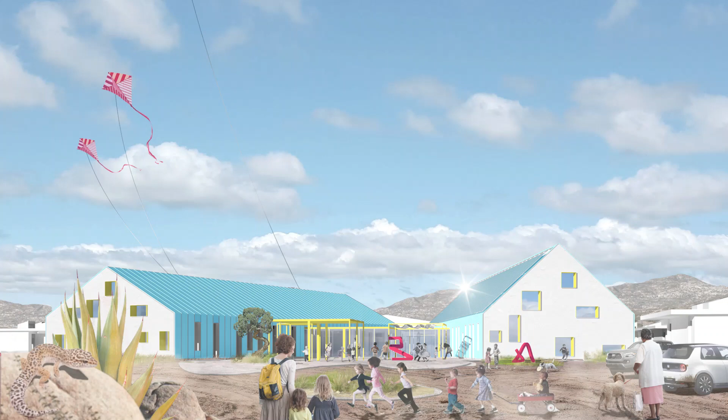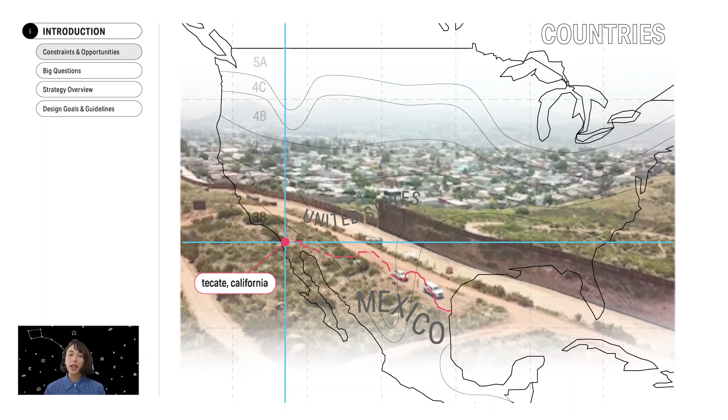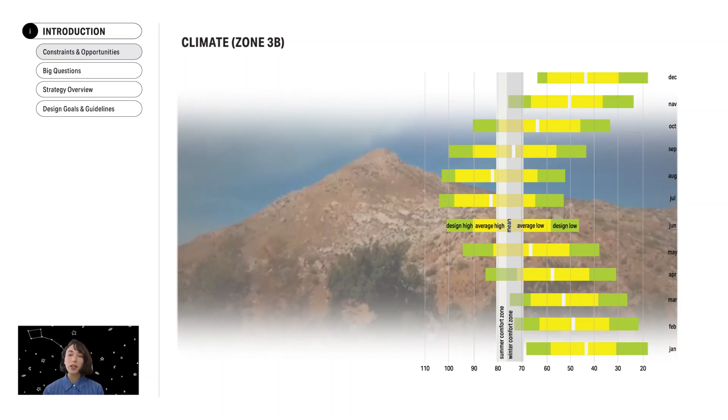Constraints and opportunities. Between Mexico and the United States, a hard line stretches over 1,900 miles, dividing countries, cities, ecologies, and even families. Our site is located in Tecate, California, 1,500 feet from this border. Sheltered by mountains at 1,700 feet elevation, Tecate experiences a climate close to that of San Diego, California, with much of the year being within the comfort zone.

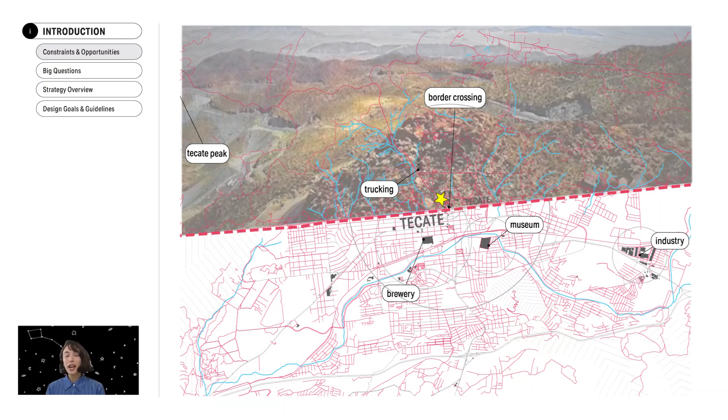Two incredibly different demographic and spatial environments exist, separated by a thin border. Tecate, Mexico is a dense suburban city and a destination for tourists. Tecate, California is an international trade community and gateway between the two countries. While there exists a physical wall between the two cities, they are far from independent of each other.

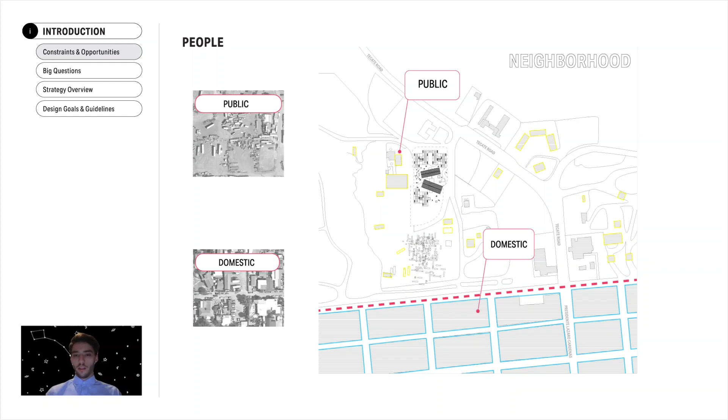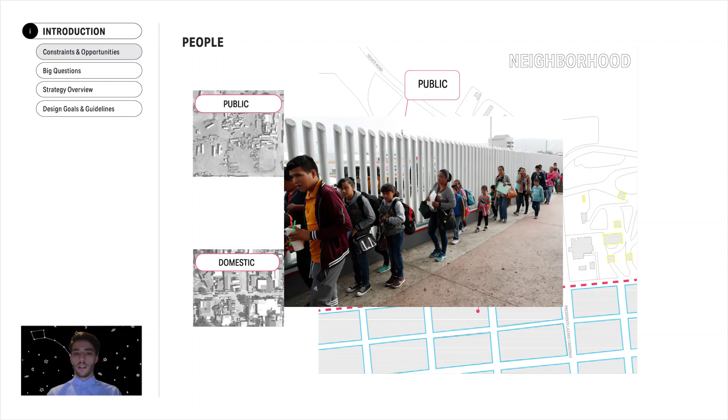With a population of 73,000, the density of Tecate, Mexico in relation to the 650 people of Tecate, California leads to a flux of diverse interaction across the border. Tecate, Mexico is demographically diverse and culturally rich, while scattered residents, government staff, and industrial workers reside in Tecate, California. Due to this imbalance, the school has potential to bring the two communities together, as a majority of students come daily over the borders from Mexico.

Climate change, border injustice, overconsumption. We asked ourselves, how can we teach children about these global challenges? And how can design teach children about these global challenges? In order to explore these questions, we look to how scientists and researchers study problems. A common tool for them is the neutral field, such as a petri dish, a glass slide, a vacuum. They allow phenomena to be isolated and studied individually.

This led us to ask the question, what if we break down global challenges into kid-sized learning moments that could be highlighted against a neutral field? The seemingly incomprehensible issues humanity faces, such as climate change, must be taught to children as they become the next stewards of the environment. These complex challenges are symbolized and broken down into kid-sized, interactive exercises through the school's design.

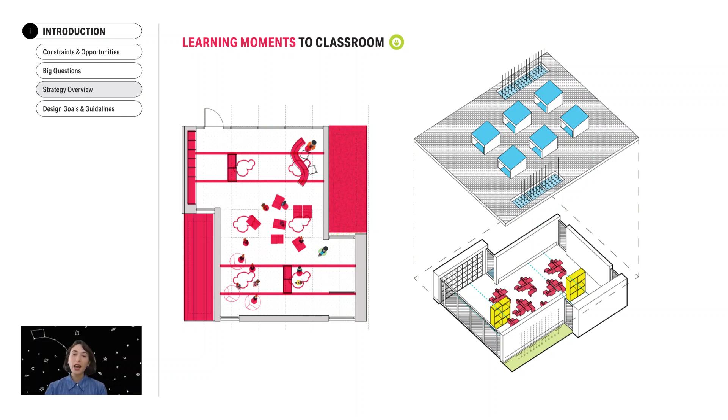As architecture and form take a back seat, climate systems and interactive objects become drivers of the student's education at all scales. Students are given responsibility over their classroom. Under the teacher's guidance, students operate active and passive climate systems, rearrange the spatial organization, and learn how to be responsible stewards of their environment.

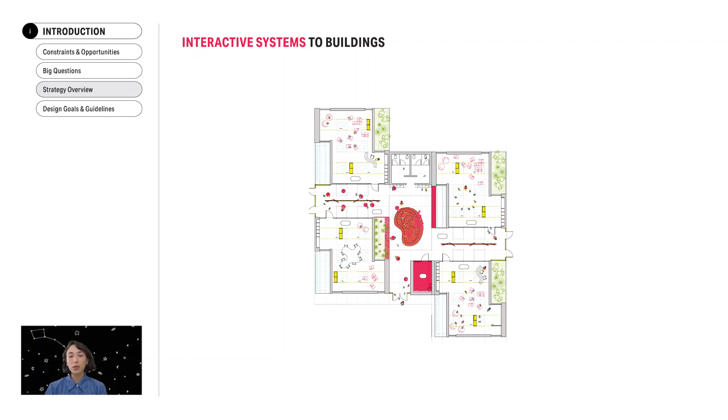The classroom cluster is a hub for students and teachers. It acts as a safe place for fostering relationships, learning, and exchanging cultural values. The site is organized on a 5-foot grid that represents the neutral field. The classrooms and pavilion structures are aligned to this grid and become parts of the neutral field.

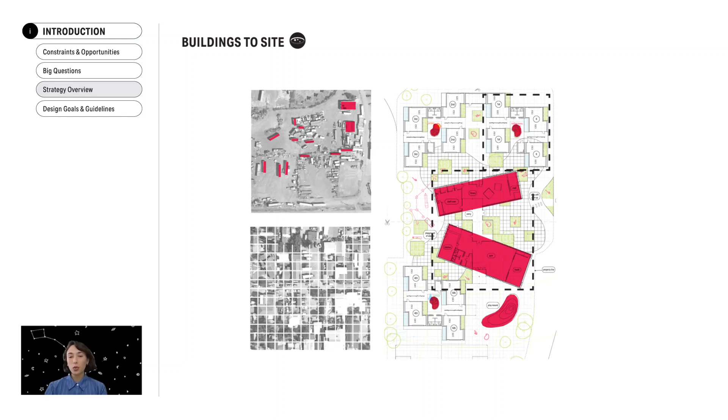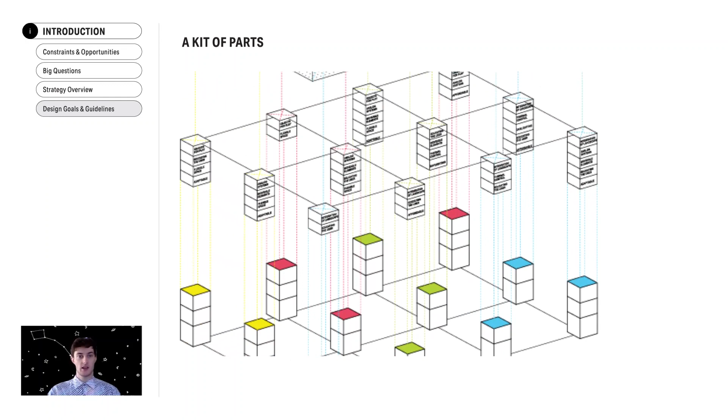The two community buildings break the grid and stand out on the field as specimens. This relationship of specimen to field, community to school, fosters student connection to each other, staff, and the local community. Throughout this project, a conceptual kit of parts organizes the presentation and explains our design thinking. This kit of parts consists of two critical concepts: specimens on a field and interactive relationships.

Different objects and systems correspond to specific learning guidelines: reciprocal energy, kids as stewards, inhabitable threshold, emergent play, and beauty is for everyone. Throughout the presentation and in the architecture itself, these guidelines are indicated with their corresponding color, visually telling the story of interactive learning moments and energy strategies.

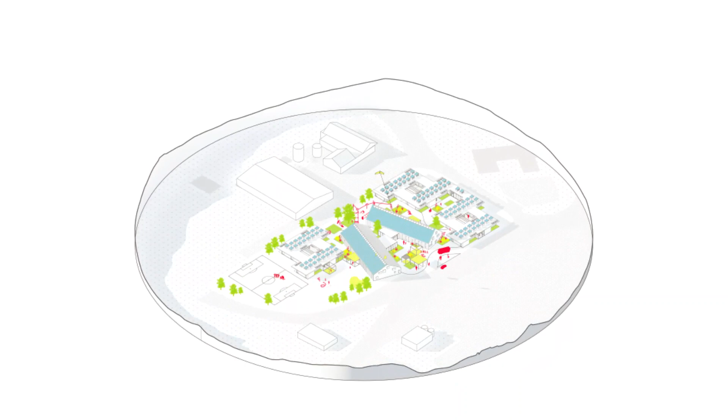Next, we will dive into our response to the decathlon competitions. As Newton's third law states, for every action there is an equal and opposite reaction. This energy balance is physically represented throughout the project in the objects, systems, and architecture. Little Dipper Elementary is a net positive school. We use 3 main strategies to achieve this and reduce energy use.

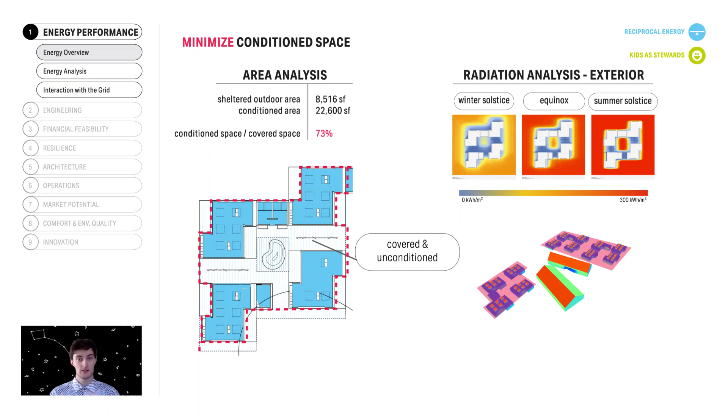First, minimize conditioned space. By providing covered outdoor circulation and gathering spaces, we reduce conditioned volume. Outdoor circulation is common for schools in this climate, minimizing demand for mechanical systems. Second, utilize passive climate systems. Solar chimneys, low windward vents, and cooling ponds allow for natural ventilation and evaporative cooling, while thick walls on the east and west reduce heat gain and increase thermal lag. And optimal use of daylighting reduces the need for electrical lighting.

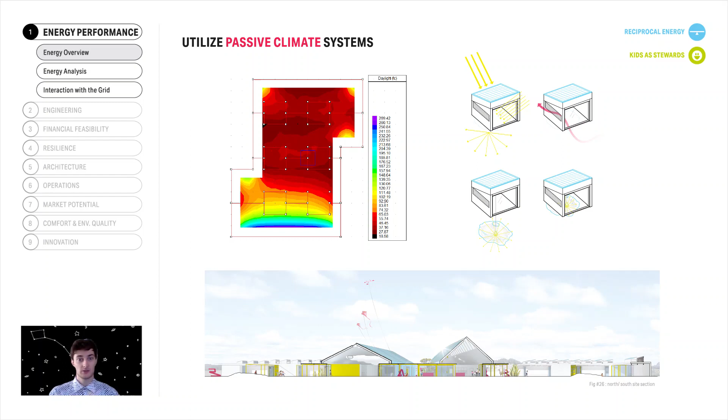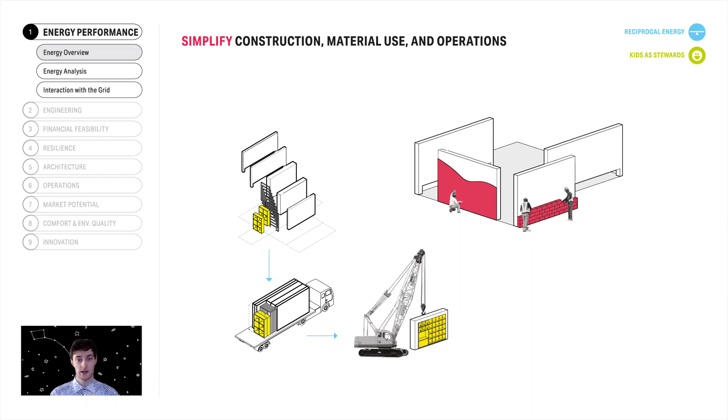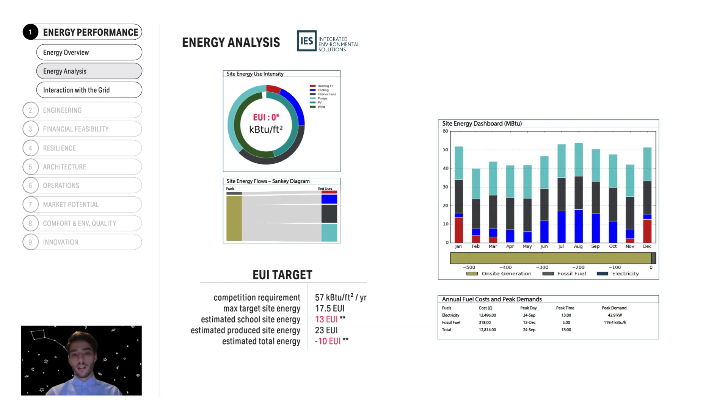Lastly, simplify construction, material use, and operations. Tied to our marketability strategies, we designed with accessible, understandable, and affordable systems in mind. We ran analyses in Integrated Environmental Solutions Virtual Environment, or IESVE. Using baseline climate systems, our model resulted in net zero energy use intensity, or EUI. With our proposed passive climate systems, we exceed the target site EUI of 17.5 with the projected site EUI of 13. With on-site generation, the school achieves a net EUI of -10.

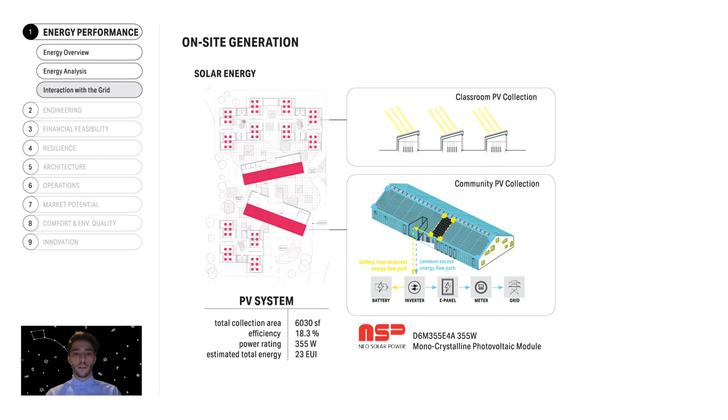Little Dipper Elementary produces more electricity than it uses with a standard monocrystalline photovoltaic array. While most energy is used on-site, leftover energy can be supplied to the local power grid. Energy systems are not only typical, but novel as well. Still under development, high-altitude autonomous kites can be tethered to generators on rooftops to produce energy. The prominent visibility of the kite also acts as a beacon that can be seen across the border, reassuring families through a visual connection to their children. Engineered systems on display show students the reality of how buildings provide shelter.

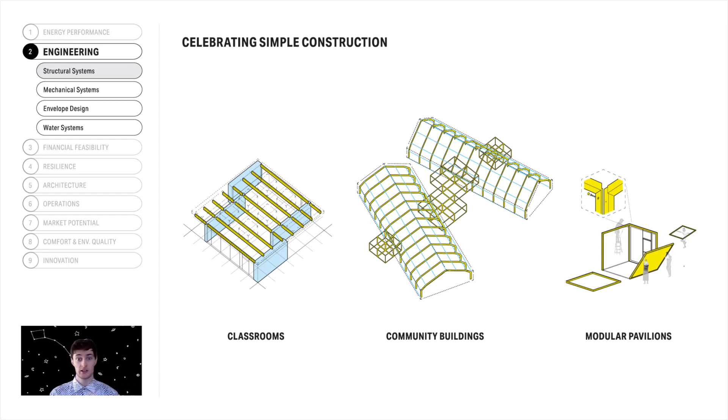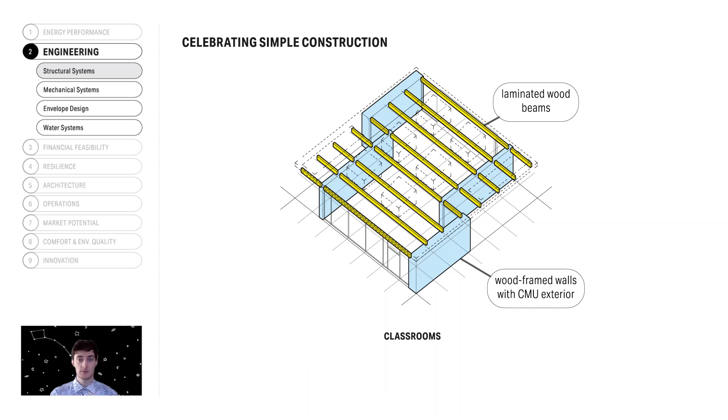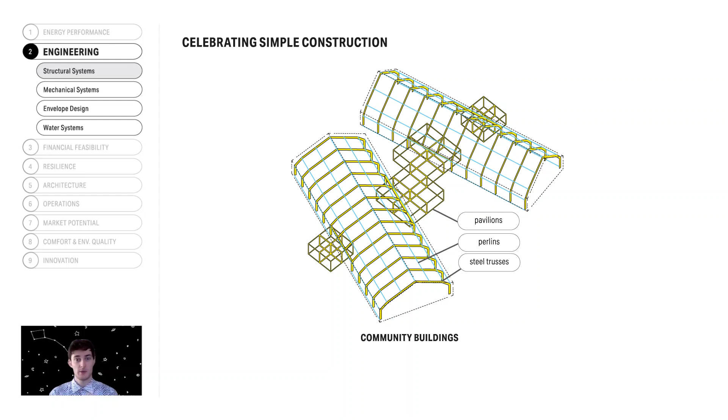Accessibility and simplicity drive the design of the structural systems, allowing the school to put more money into vibrant learning experiences. The classroom consists of prefabricated wood-framed wall panels with an exterior CMU layer. Laminated wood beams span the distance between the walls and support the flat roof. Continuing the tradition of industrial construction in the area, the community buildings are made of widely available prefab steel trusses, with knowledgeable builders and materials close by. Prefabricated modular pavilions are assembled on-site with standardized structural square frames that can be fitted with a variety of infill panels.

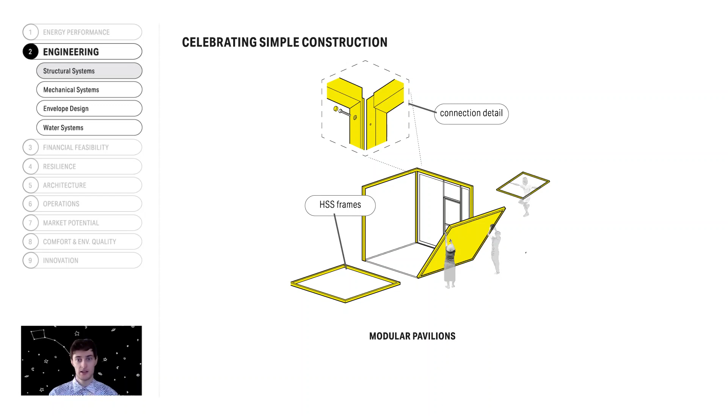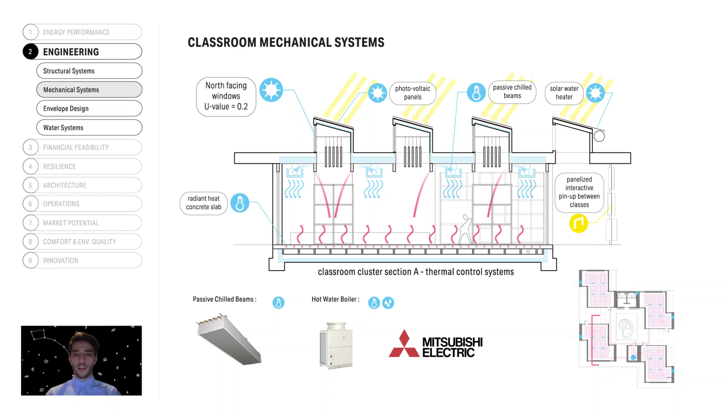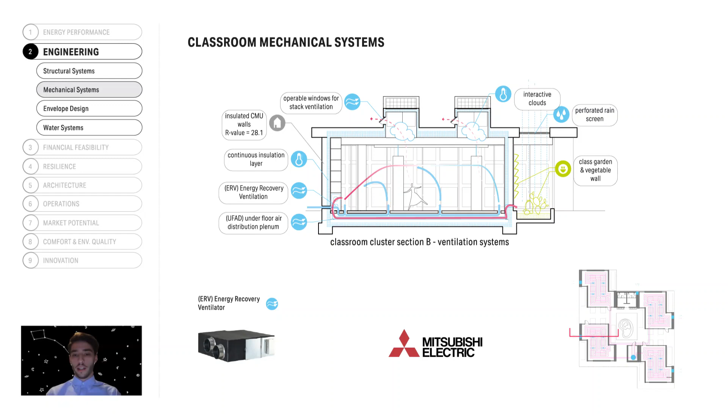Radiant floor slabs make the classroom cozy by the time students arrive. In cooling mode, passive chilled beams cool rising hot air. Low windward intake vents sit above an evaporative cooling pond, cooling supply air. Roof monitors provide evenly distributed and adjustable daylight for classroom activities. Classroom air is kept fresh via an energy recovery ventilator. Operable roof monitor windows work in tandem with low windward facing vents.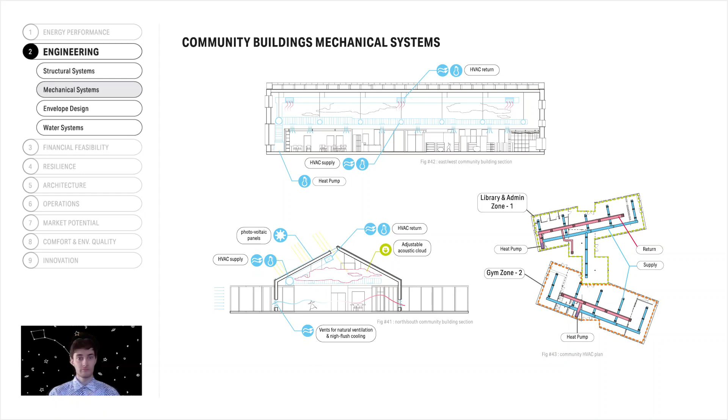In the community buildings, we wanted to reflect the industrial vernacular and utilize a standard high-efficiency HVAC system. The community building's wall assembly, which wraps the roof, can be summarized as a highly insulated industrial warehouse. Following passive house principles combined with prefab wall assemblies, the classroom wall is designed to maximize thermal insulation and affordability. Little Dipper Elementary reduces its water use by implementing a cradle-to-cradle approach to waste. Composting toilets and compost gardens teach students about taking responsibility for their own waste, and rainwater collection reduces dependence on city water.

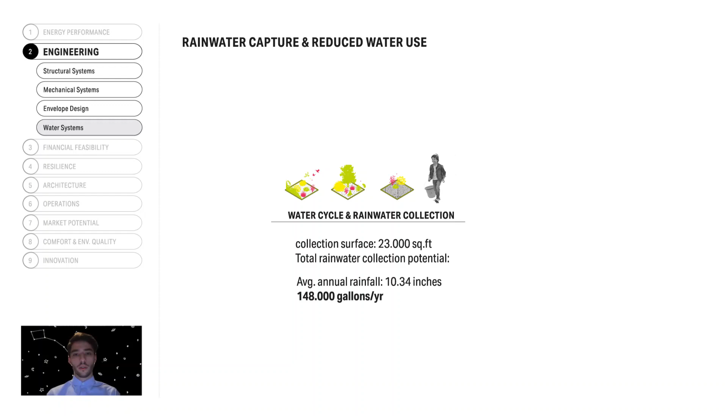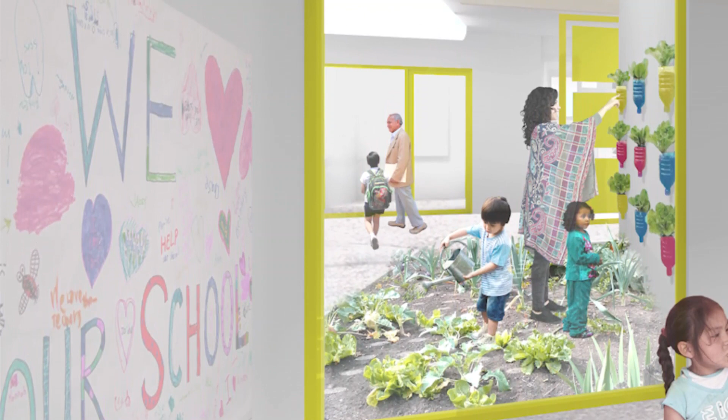We believe that beauty is for everyone. This value is carried throughout the project to create equitable access to beautiful spaces by reducing maintenance, operations, and construction costs at every scale. We designed buildings that were inspired by the local vernacular. This means that maintenance and repairs can be contracted locally, and the low-cost, durable industrial materials can be sourced locally as well. A variety of factors reduce maintenance needs, reduce energy consumption, and reduce operations costs.

Passive, along with low-tech systems, means fewer moving parts likely to break. The exclusive use of native vegetation fits seamlessly into the site's ecology, requiring less human intervention. And most importantly, student participation in daily maintenance and operations is integrated into the curriculum, inspiring students to become responsible stewards of their environment.

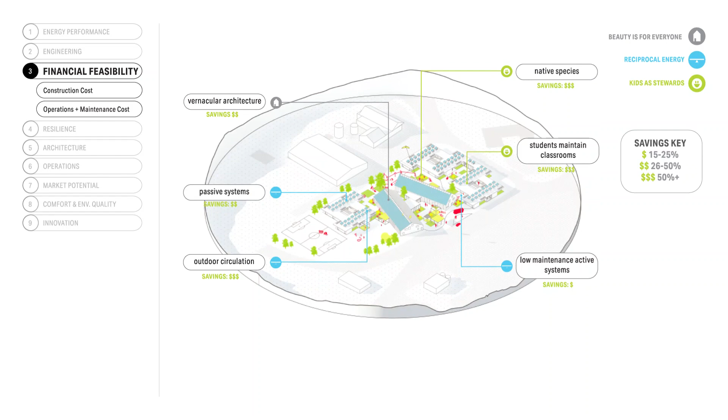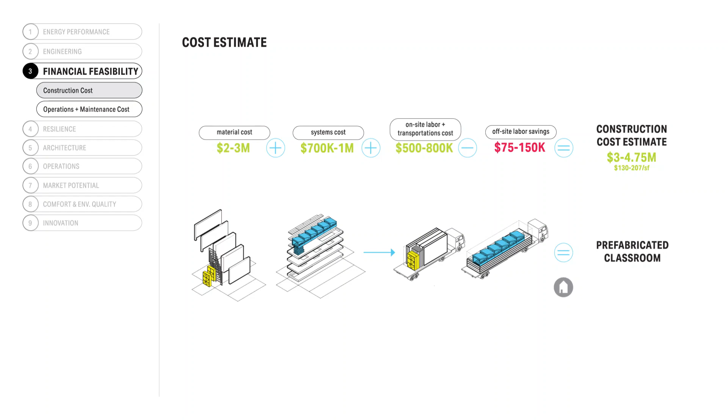We estimate that construction costs will be between $3 and $5 million. At around $150 per square foot, this energy-efficient and innovative school can be built for equal to or less than the average cost of an elementary school in the United States. Our biggest savings come from low-tech systems and student participation in daily maintenance and operations. But each user group has a part to play in reinforcing the message of stewardship and creating an environment where students can easily maintain and operate their learning spaces.

Tecate, Mexico exists on a dynamic site; experiencing seasonal wildfires, periodic power outages, and a fluctuating economic and political situation requires any proposal to prepare for changing circumstances. In the scenario of a wildfire, the community clusters serve as a shelter for the surrounding community. The highly insulated assemblies provide higher fire resistance than typical industrial or commercial buildings, and the large open floor plan provides ample gathering space.

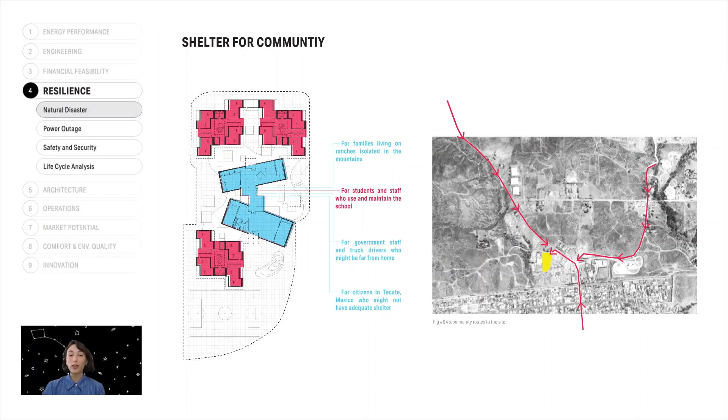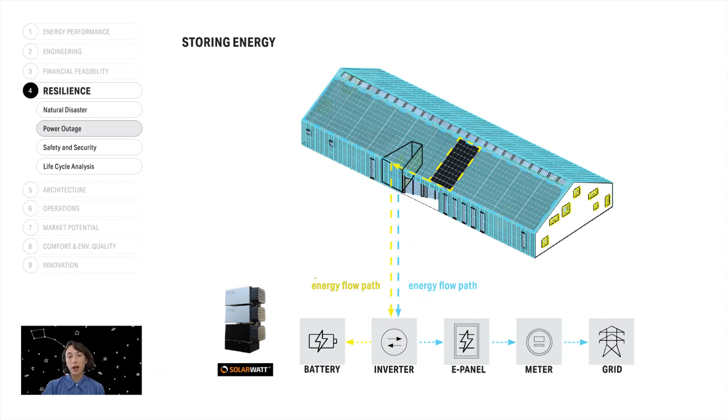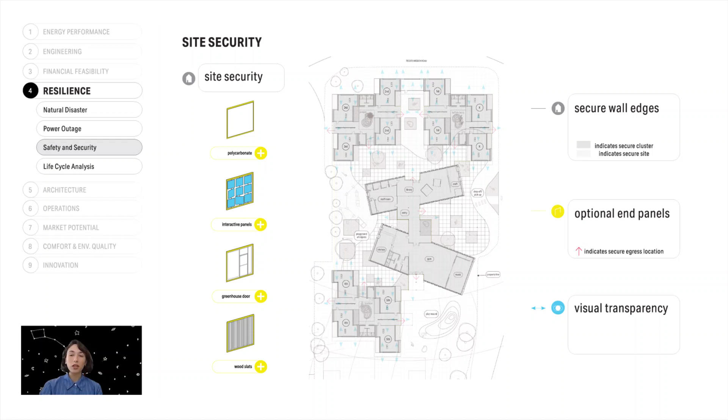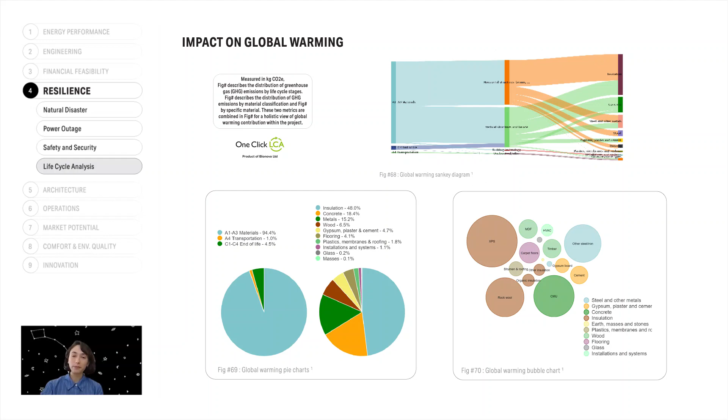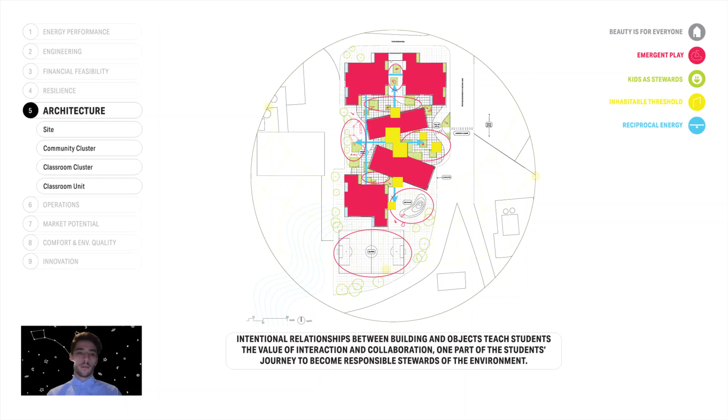Inhabitable thresholds suggest that barriers do not have to separate, but can be utilized for the benefit of inhabitants. Visual connectivity between spaces, lack of corridors, open gathering spaces, and modular yellow pavilions stem from this concept. Central community zones are connected to private learning zones via outdoor learning and play areas. The community clusters and playfields are intended to be used as recreation places for both students and community.

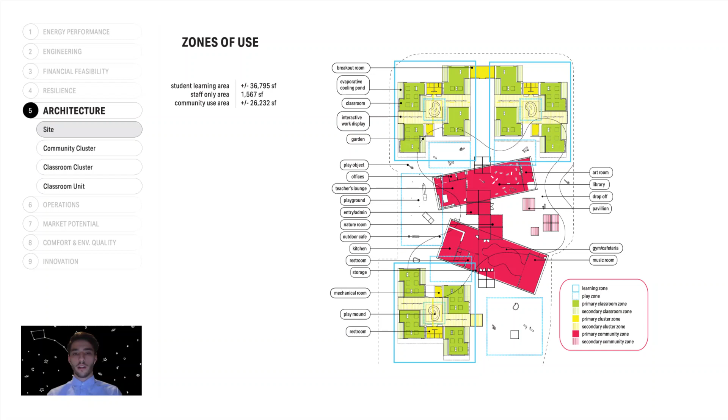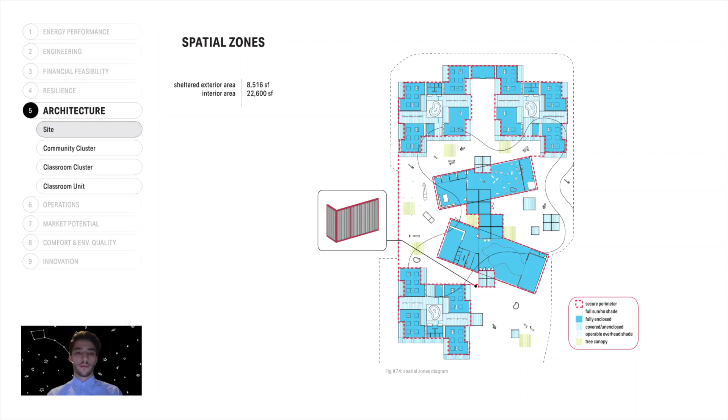Different levels of enclosure provide shelter and security, from fully enclosed buildings to semi-enclosed pavilions to covered circulation to open fields. This spectrum of enclosure breaks down thresholds and increases energy efficiency. A grid overlaying the site designates ground conditions. Squares of concrete fill a central puddle shape connecting clusters. Local plantings at different densities fill grid squares and act as specimens on the field.

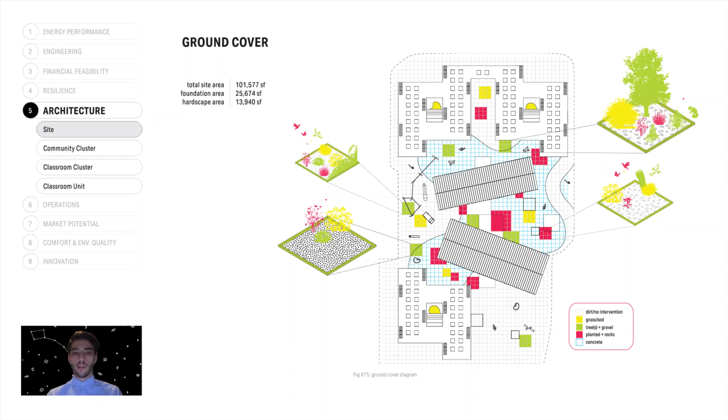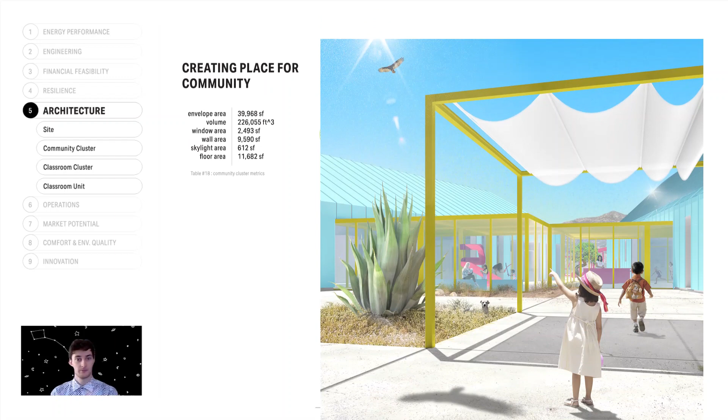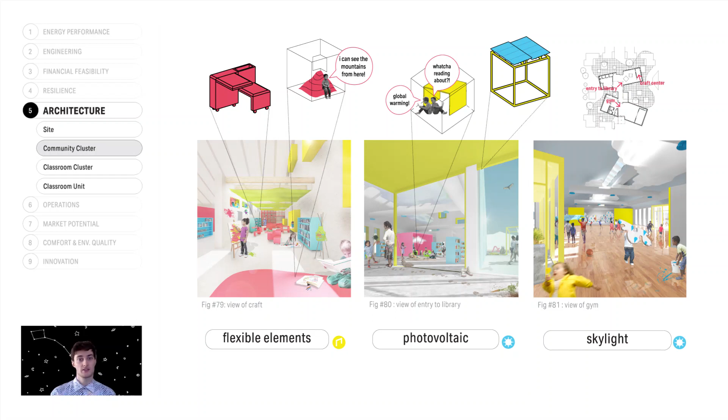Entering the library, students and staff interact with scattered blue bookshelves. Pink reading rooms dance under HVAC ducting and fabric clouds, diffusing daylight. In the craft center, students paint and play. The climbable pink mound provides a great place to read. In the gym, yellow sliding panels are pushed open and students prepare the elevated music room for a performance.

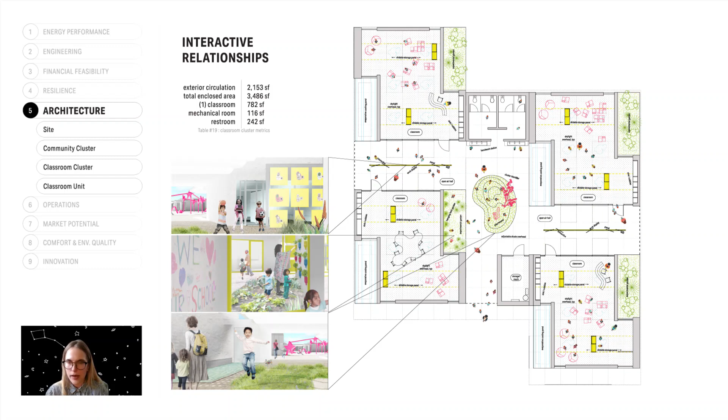4 classrooms create micro-communities of students and staff. Students of similar grades share a panelized pinup wall and exchange ideas. Students garden together and roll back the courtyard shading device in good weather. A central courtyard is both the main entry to the cluster and a gathering place. A mound with a unique identifier acts as a landmark, giving each cluster an identity.

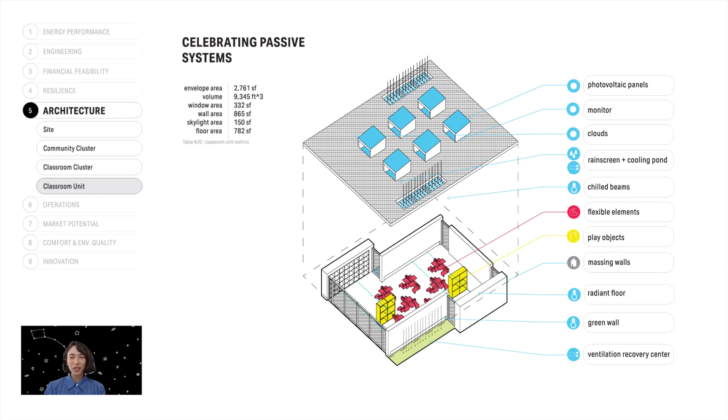Here, learning moments take the form of interactive and functional objects. You can see students playing ball near the mound, the shading device diffusing the bright sun, and the climbable objects of the playground framed beyond. Orthogonal and accessible, the classroom is designed to be neutral, to provide a blank canvas for interactive learning. Interactive relationships include movable storage shelves, desks, and adjustable passive systems.

Students push vibrant movable storage shelves back and forth to make both large gathering or small breakout zones. Their desks combine chair, table, and storage, fitting together for easy organization and flexibility. Students learn about the effects of daylight through manually adjusting fabric clouds that hang from roof monitors. Each element is intentionally designed to engage the students.

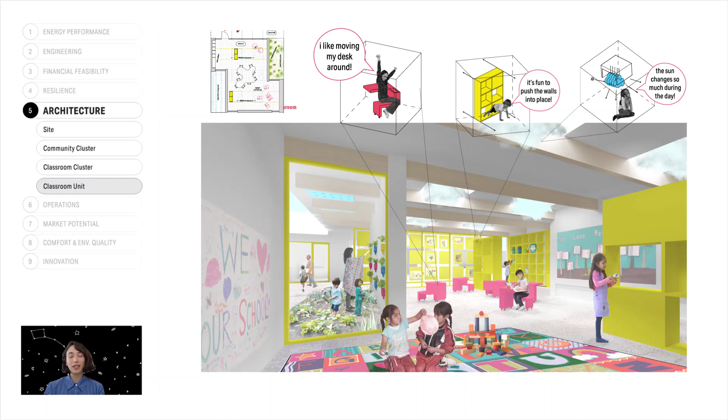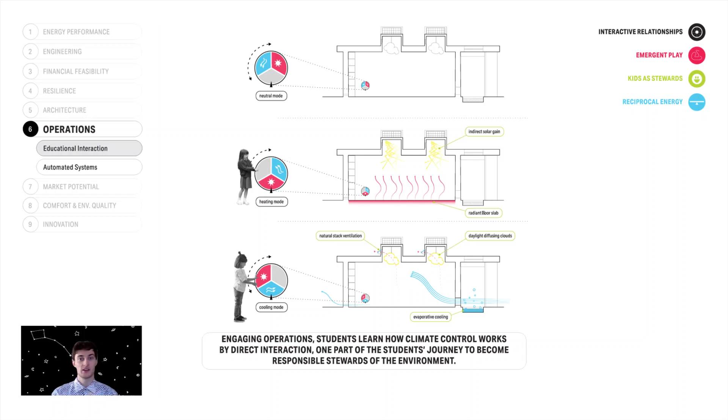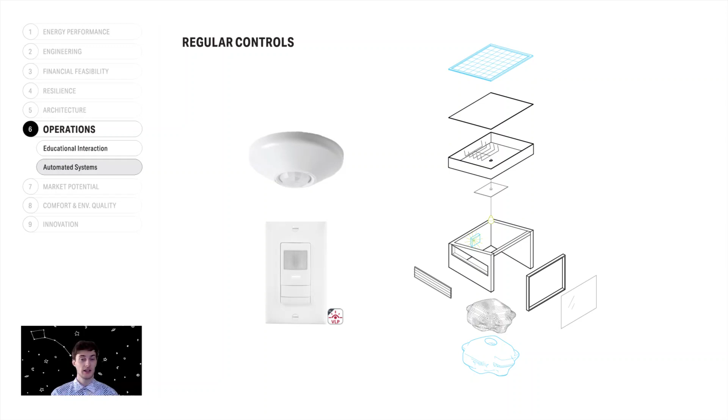Students also engage in the school's operations on a deep level. Through playful switches, students cycle through climate modes in the classroom with indicators letting them know what the wind is doing, what temperature it is outside, and how much solar radiation is available. Temperature and humidity sensors placed in the classroom and the community buildings collect data, doubling as a climate curator.

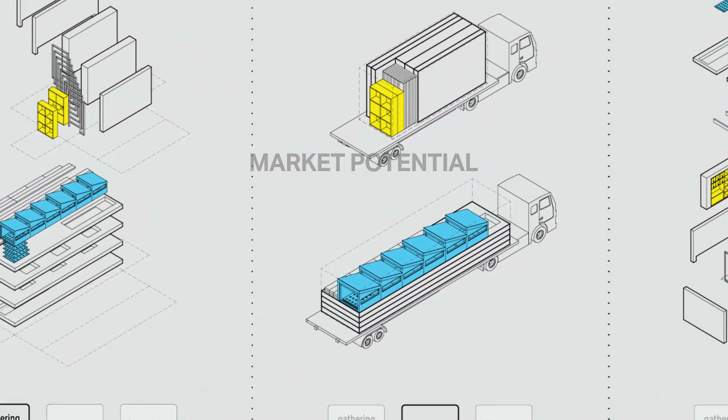Little Dipper Elementary serves as a prototype for affordable net zero primary schools by combining prefabricated, site-specific, and customizable elements. Prefabricated elements are displayed in a catalog where clients are able to select from standardized classroom components. Add-ons such as pavilions can be added to classrooms or used as standalone structures. These systems allow for easy phasing of projects or future expansion.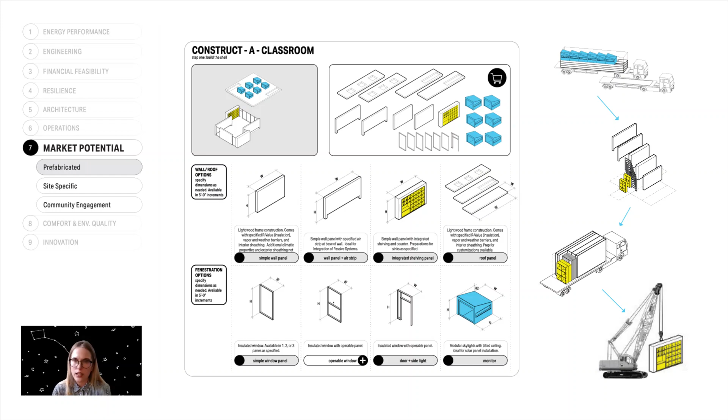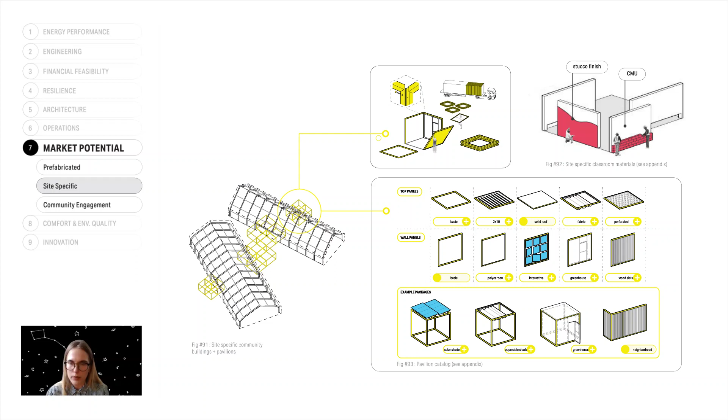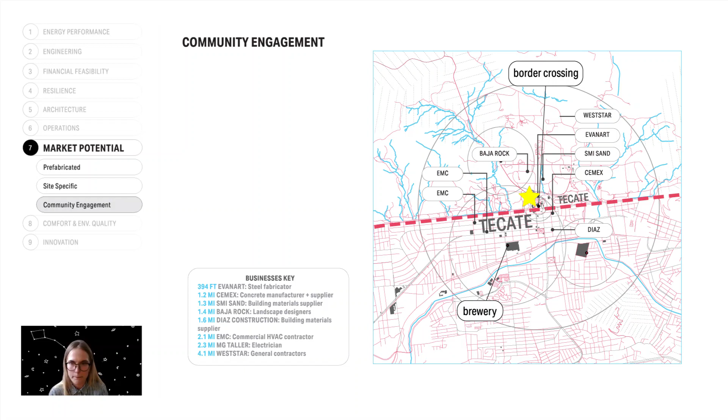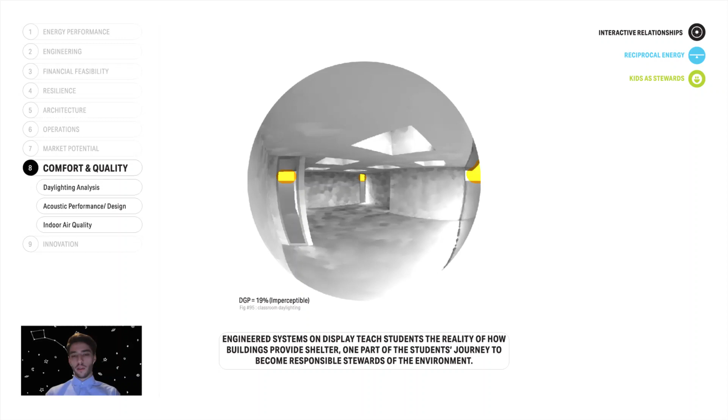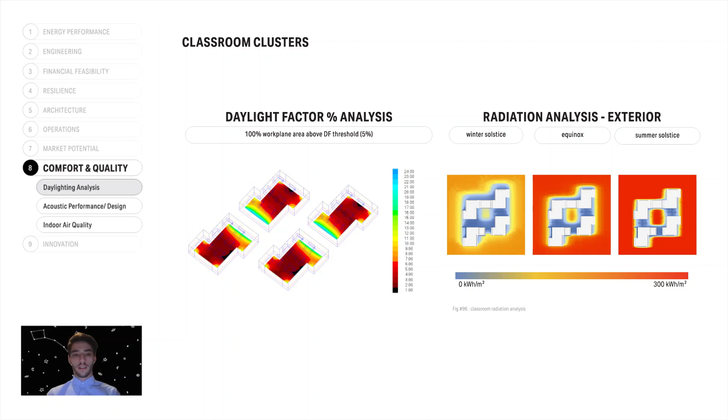Engineered systems on display teach students the reality of how buildings provide shelter. Students are given the opportunity to experience a net zero building and understand what that means. Students can concentrate on their tasks with comfort as 100% of the work plane area is above daylight factor threshold when utilizing just the roof monitors. The community cluster also provides ample light with skylights and windows. A shaded circulation axis provides connection through the site.

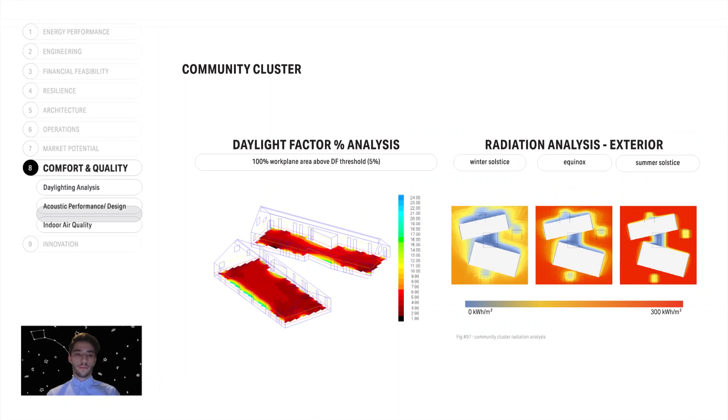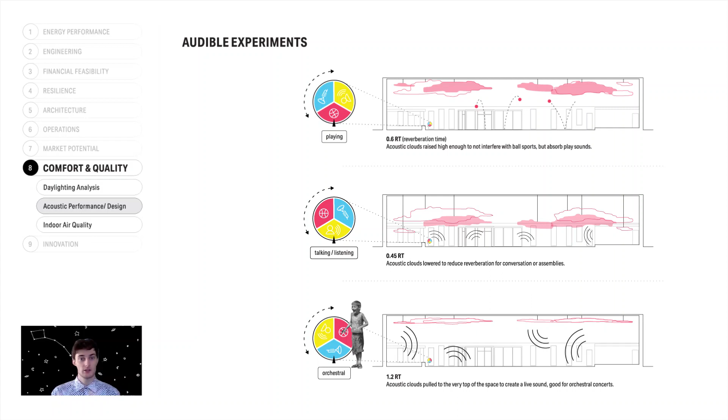To encourage inquisition and practical experimentation, students are responsible for the acoustic environment of the larger community spaces. Both the gym and the library spaces have large acoustic clouds made of absorptive fabric. These clouds can be raised, lowered, or compressed to absorb more or less noise. A switch allows students to control their acoustic environment through preset modes. Indoor air quality is kept fresh through low-emitting materials, optimal active ventilation systems, and night flush purging.

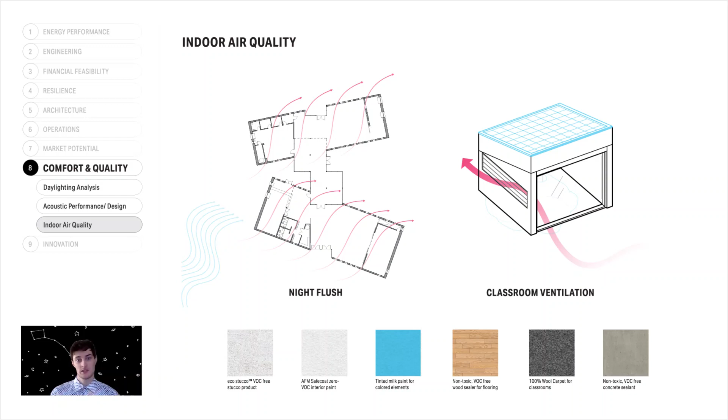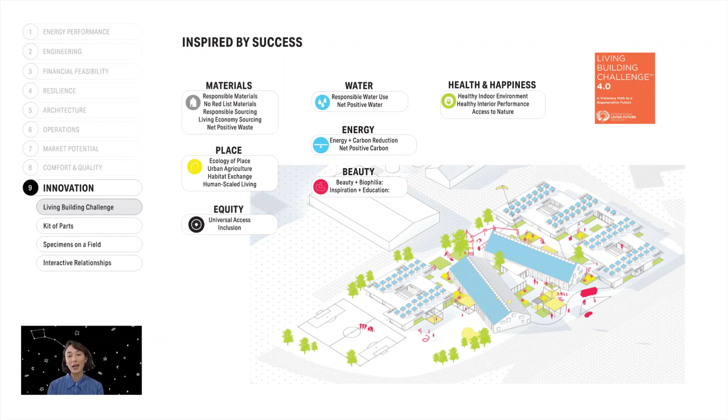The heart of this project resides within the desire to create fun, interactive moments for children to be inspired to learn about and engage with the environment around them. A goal of holistic and responsible design was sought after. Similar to the Living Building Challenge, our project's goals address categories of materials, water, health and happiness, place, energy, beauty, and equity. We wanted to showcase that even the most common materials and methods can be used to make beautiful places. With a catalog of prefabricated building elements, schools can be designed quickly and affordably while still allowing for contextual interventions and high standards of quality.

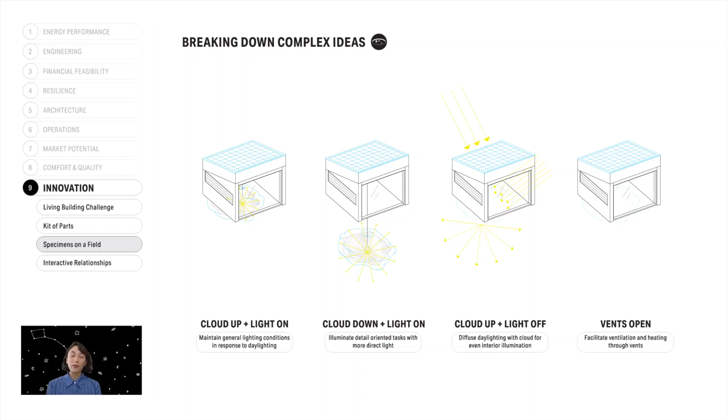Like samples on a petri dish, students learn about passive climate systems, culture, and play through vibrant objects on a neutral field. These objects become tactile learning moments that simplify complex environmental systems. With objects like the interactive cloud, students learn about the direct connection between comfort and systems. Finally, but perhaps most encompassing, is the goal for students to take an active role in adjusting their environment by interacting with educational elements. Whether for play, learning, or climate responsibility, students engage with these various elements to foster a sense of ownership for their own space through collaboration and exploration.

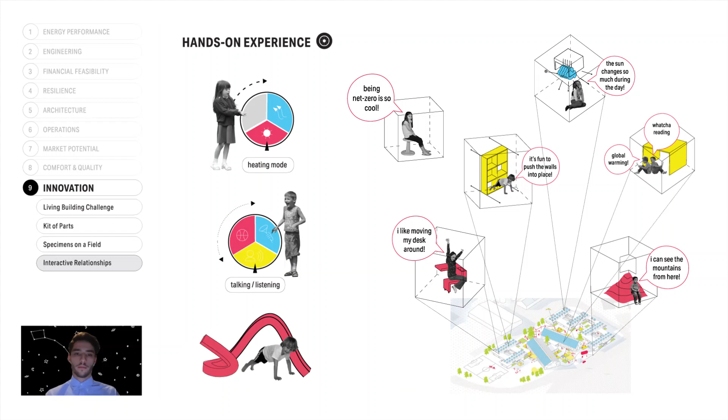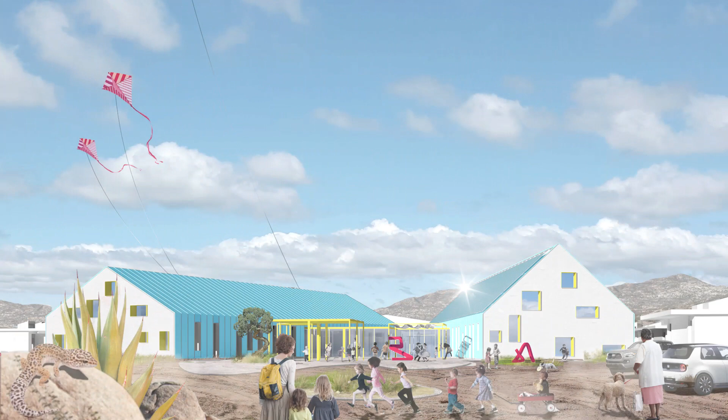We understand architecture as a comprehensive subject that is a collaborative effort of multiple industries. Through this project, we have all gained a new admiration for our adjacent fields and their experts. We have also developed a deeper understanding of the incredibly difficult social, political, and environmental challenges that exist on the border between Mexico and the United States.

Through breaking down global challenges into kid-sized learning moments, encouraging active learning through interactive relationships, and letting the building be a stage for education, we believe that Little Dipper Elementary is a step forward in the exploration of these issues and represents an optimistic narrative for bridging the barriers and engaging with future generations. Most importantly, this project asks not simply how a building can produce as much or more energy than it uses, but how a design, in every regard, can inspire children to be responsible stewards of their environment, ecosystem, and community.